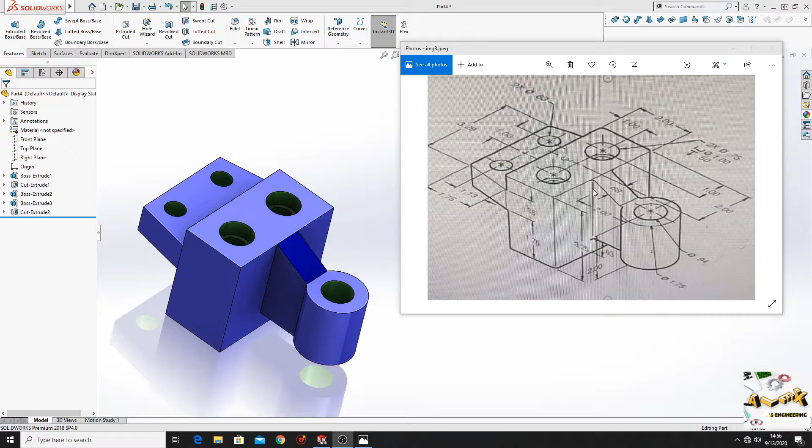So let's start. First we'll have to open a sketch on the top plane. Here we'll have to make a corner rectangle. Now let's dimension this: here will be 2 millimeters, and this side will have 4.

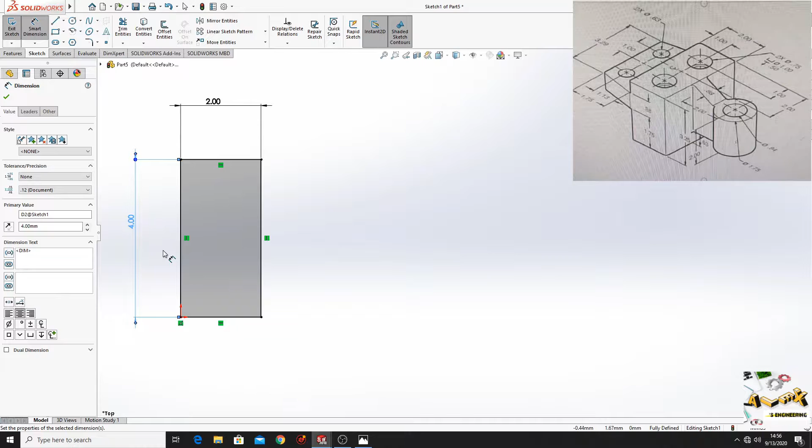Okay, now let's make a center line, and make 2 circles on this center line. Select both of them and then make equal. Now let's dimension them: we have the dimension of 0.75 millimeters.

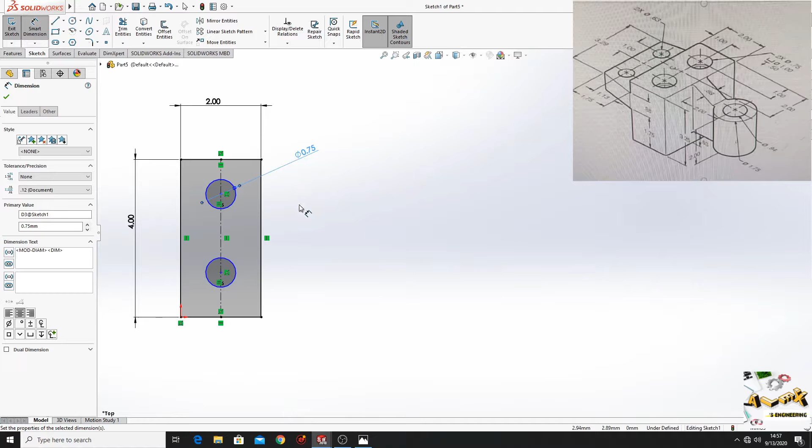And the dimension from this center point to this line will be 1, and here the same. Now go to features, extruded boss base, and here will be 3.25.

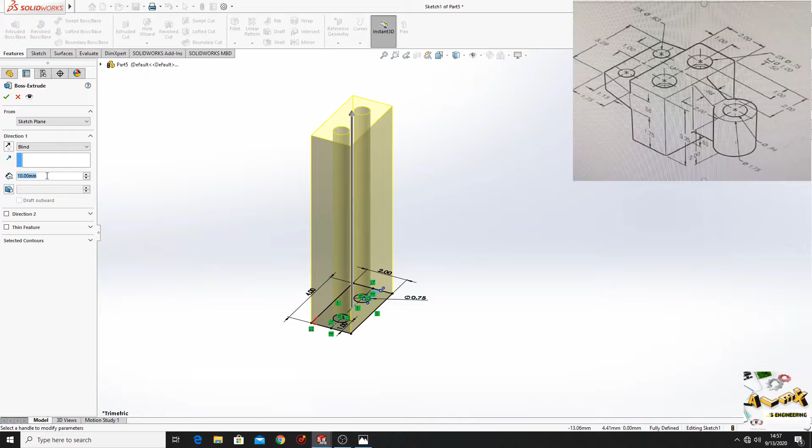Now select this face, open a sketch, normal to, and here we'll have to make 2 circles. Select and make them equal, and then give them the dimension of 1.

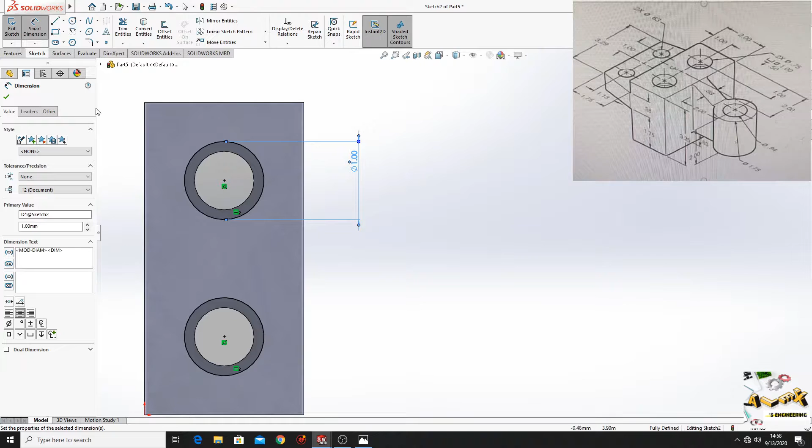Now go to features, extruded cut, and here put 0.5, and press OK.

Okay, now select this face again, open another sketch, normal to, and here we'll have to make the next sketch. Let's dimension this: here will be 3.29.

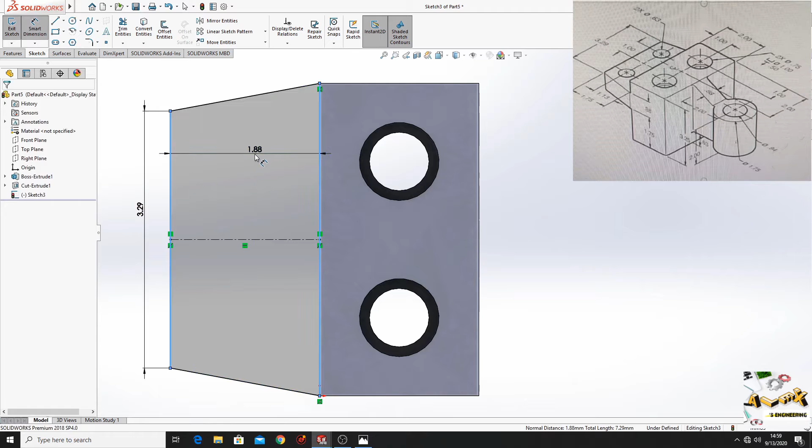Let's make a center line from the middle of this line to the middle of this line. Now select this center line and select here make horizontal. Now the dimension from this line to this line will be 1.75.

Now let's make 2 circles with the dimension of 0.63. Make them equal.

Now the dimension from this center point to this center line will be 1, and here will be the same, 1. Okay, and from this center point to this line will be 1.13.

And now select this center point and this one and select here make vertical. Okay, now go to features, extruded boss base.

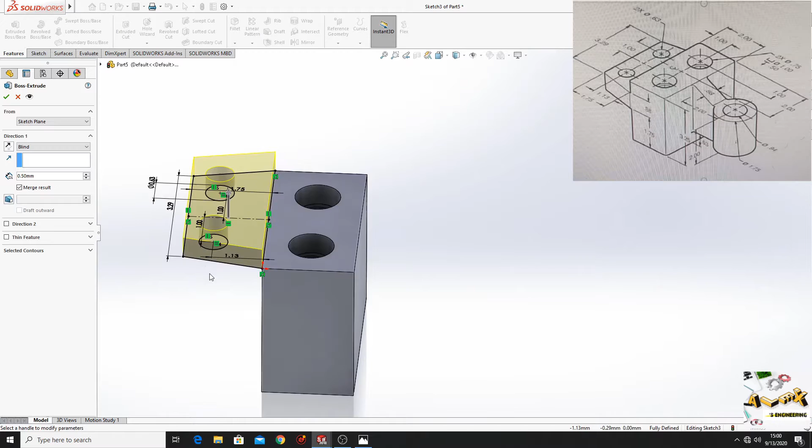Here select reverse direction and here select offset from surface. Select this surface and here put 1.75. And press OK.

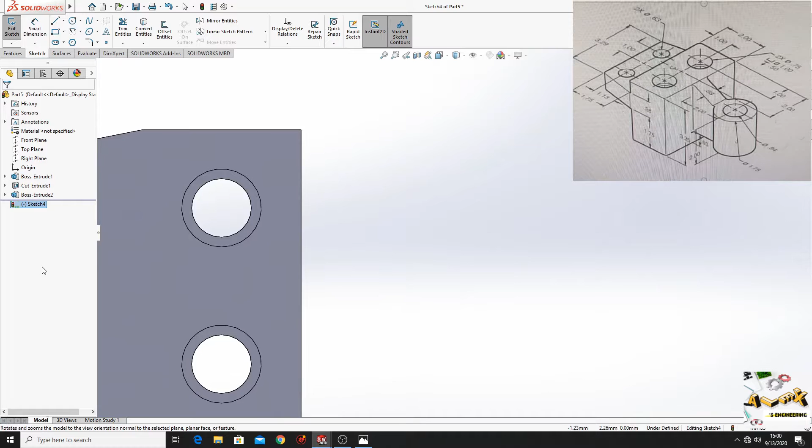Perfect. Now select this face again, open another sketch, normal to. Here make a center line from the middle of this edge.

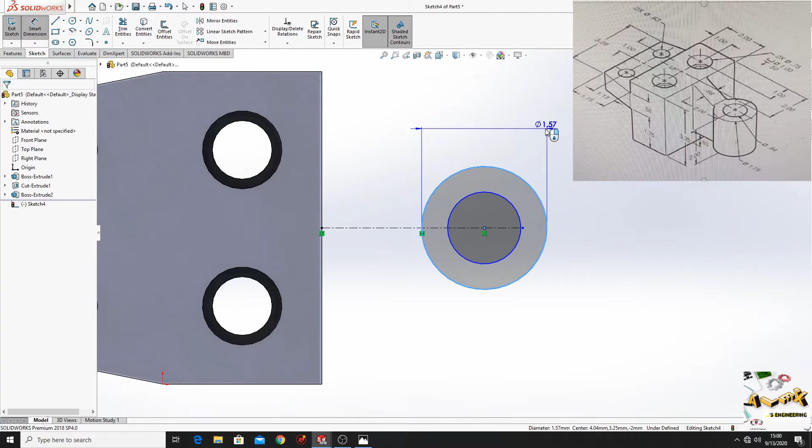Now we'll make a circle here, actually 2. This one will have the diameter of 1.75 and this one will have it 0.94, and the dimension from this point to this line will be 2.

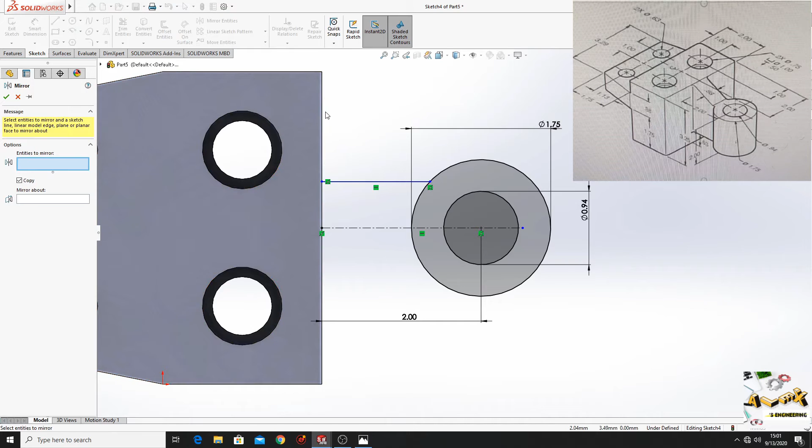Nice. Now select line and make a line from this edge to this circle, and then use mirror to mirror this line, and at mirror about select this center line. Now the dimension from this line to this line will be 0.88.

Now use trim entities to cut this part of the circle, and use line to close this sketch.

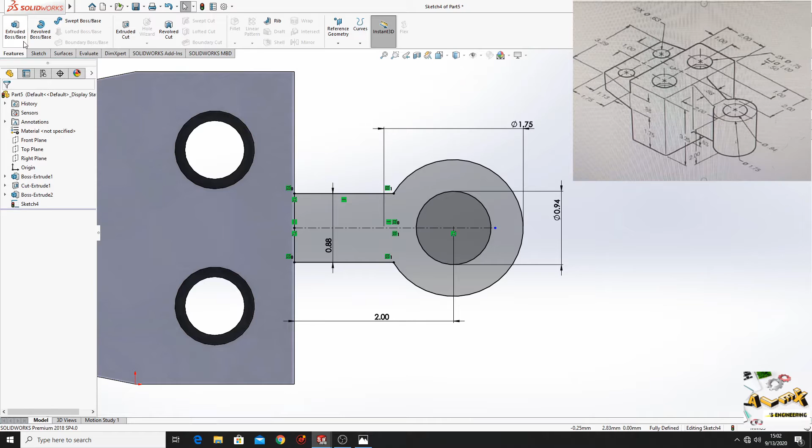Now go to features, extruded boss base. Here select reverse direction, and then select offset from surface. Select this surface, and here select 0.63.

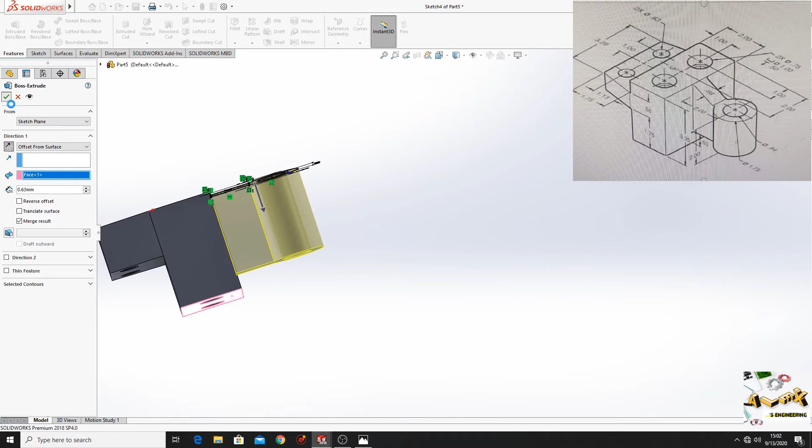Okay, press OK. Now select this face and open a sketch, normal to, and here make this rectangle first.

Give here the dimension of 0.88.

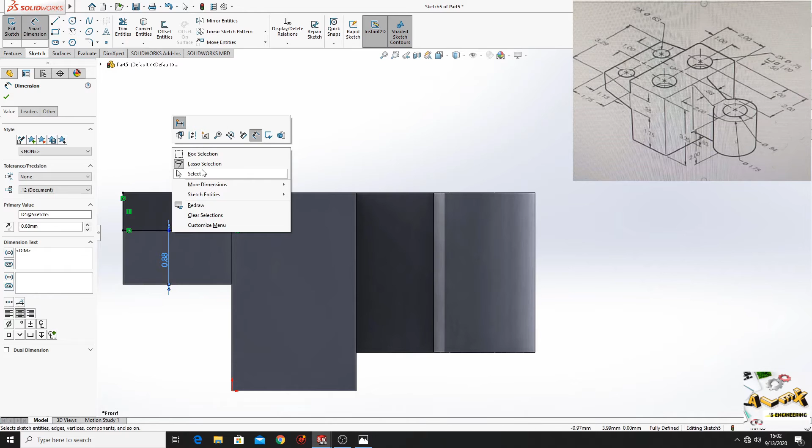Nice, and then here make this sketch, and here give the dimension of 2. Okay, and be sure these 2 points are coincident.

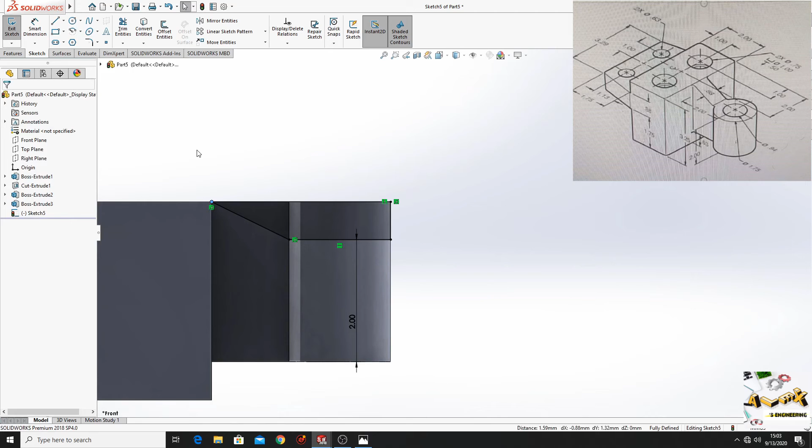Now go to features, extruded cut, and here select through all. And this part is done.

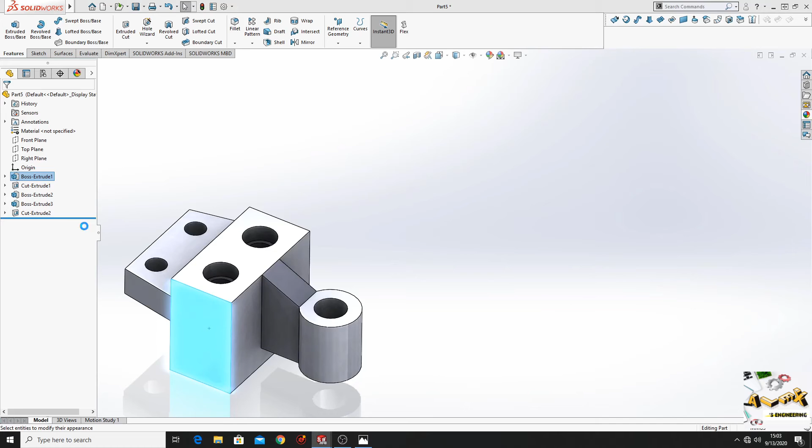Right click on it, go to appearance, body, and select the color you want this part to be, and then press OK.

Right click on this inner face, go to appearance, select here face, then select all of them, and choose another color.